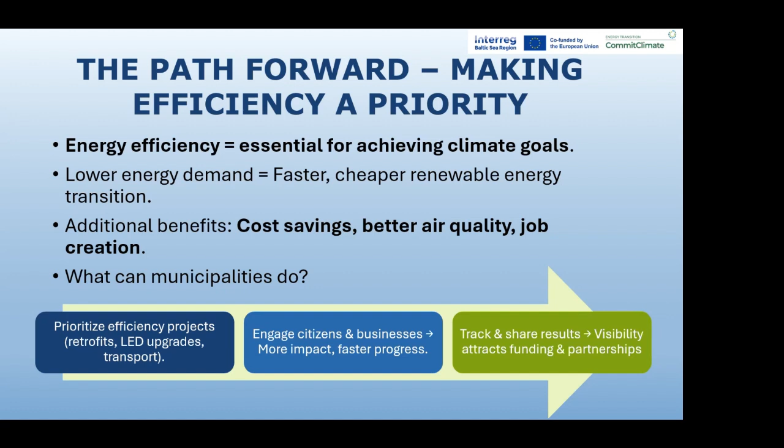So now, what can municipalities do? Firstly, they have to make efficiency the foundation of every action plan: invest in building retrofits, LED street lights, and efficient transport, for example. Secondly, engage businesses and citizens, because efficiency succeeds when the whole community participates. And thirdly, track and promote results, showing that progress attracts funding and helps scale solutions.

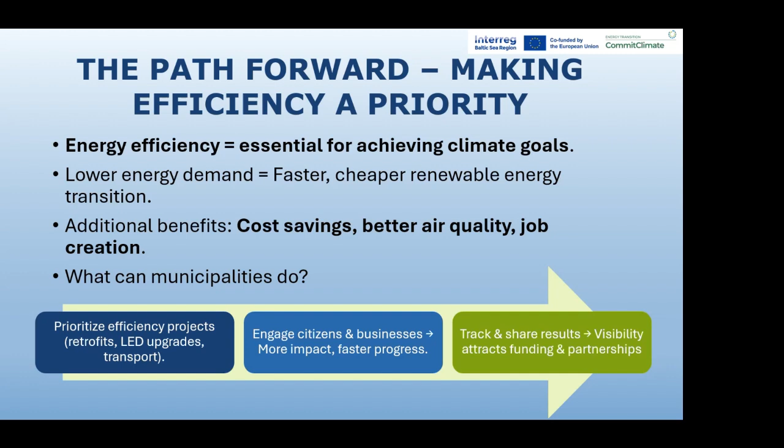So in short, if we want carbon neutral cities, energy efficiency isn't optional, it's essential.

Today, this topic is about empowering youth for energy efficiency. And as Alina already said, all the cities around the Baltic Sea region, and not only around the Baltic Sea but also in Europe, are fighting for reducing our carbon footprint and also for making our infrastructure, our buildings, more energy efficient.

In Latvia, we are in Riga, the capital. We are the largest city with more than 600,000 inhabitants, and if we look at the metropolitan area, then it's even bigger, approximately 1 million inhabitants. So the impact of Riga towards the country's carbon footprint is very significant, and the housing sector and heating sector are the major directions where we are focusing in order to make them more energy efficient.

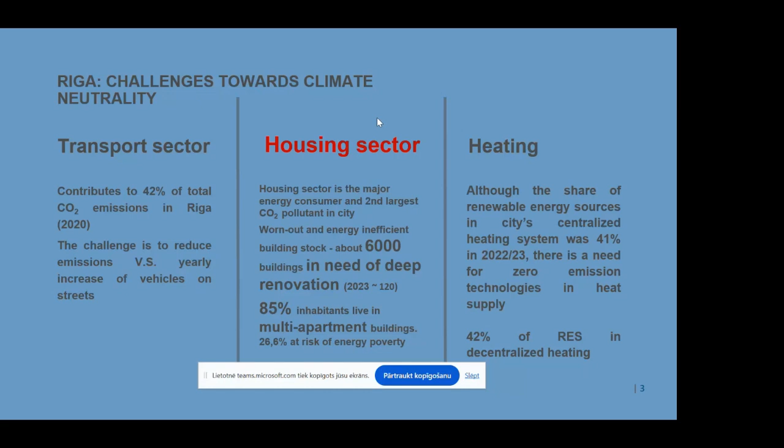We have quite a large apartment house market, our historical buildings from the Soviet time, especially approximately 6,000 apartment buildings that need deep renovation. And for that, we certainly need the support of our citizens and inhabitants of these multi-apartment buildings.

Riga city has already done a lot to engage our citizens in decision making and persuade them that energy efficiency is one of the main activities. We have, for example, the GeoRiga open portal where any citizen can come and see what his building is, how energy efficient it is, and it makes it easier for us to persuade citizens to invest in their houses.

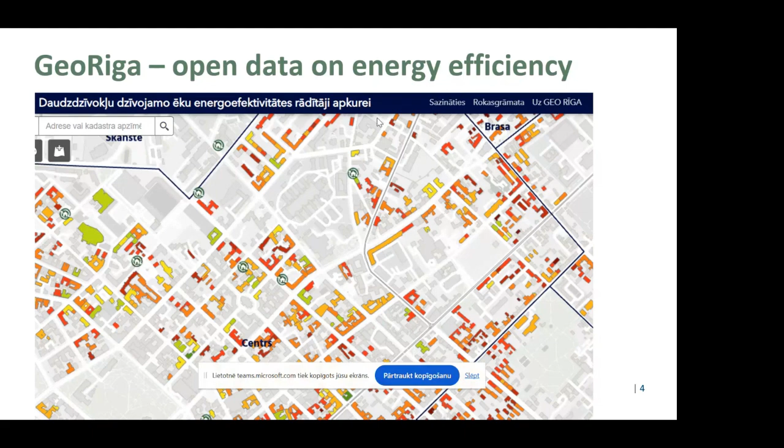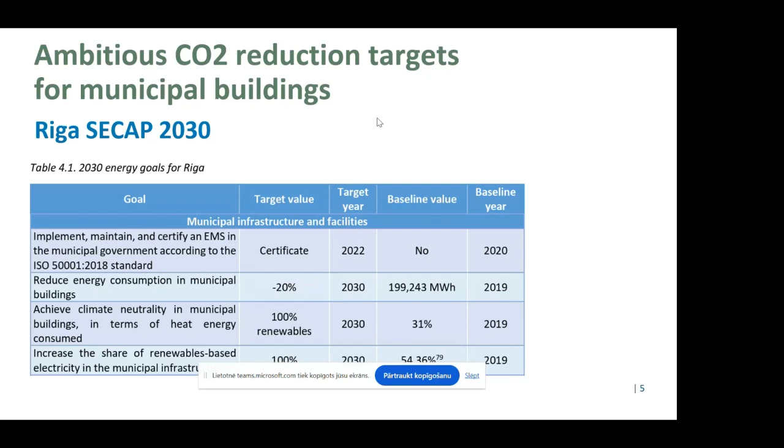As already Alina told, we have a quite ambitious sustainable energy and climate action plan for our city, where we have to significantly reduce energy consumption of municipal buildings, and also reduce CO2 emissions for the infrastructure.

What have we done already? In 2021, we set up an integrated monitoring system of our municipal buildings, where all the libraries, schools, and kindergartens were connected in one unified energy management system. Based on this, we can see in a centralized way comparative data on consumption of heat, electricity, and water, and we see the trends and where we could increase efficiency measures.

Of course, we also have invested heavily in our municipal sector, in schools in particular. We have had renovation of their heating systems, the general systems, so that the schools are prepared for much higher savings in energy consumption.

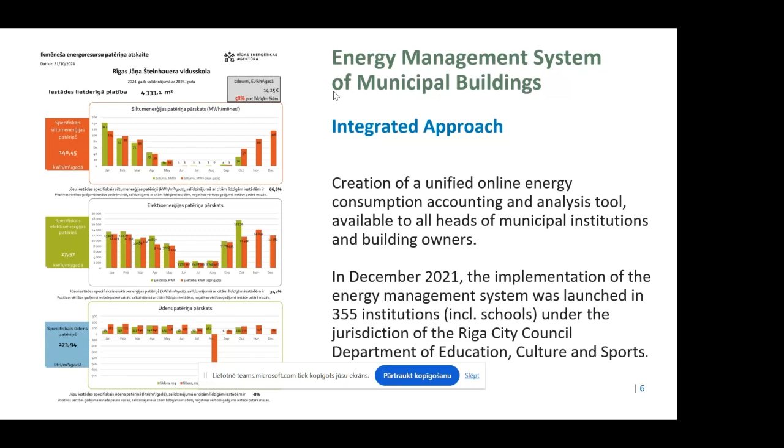But one of the daily challenges we face is how to ensure effective daily energy saving decisions. The masters, the directors of schools, are responsible for the educational process, not for the management of real estate. This is kept in separate infrastructure departments, in the financial and ownership department of our municipality. So sometimes we see that the schoolmasters and teachers are not so interested in saving energy, despite already having quite up-to-date modern energy systems in place in schools.

So one of the solutions we have found is that we have to invite youth to take part in the decision making in daily life, to empower existing eco movements in schools with additional knowledge and tools for how, on a daily basis, the schools and groups of classes can save energy, and to make this saving interesting and attractive, so the pupils can be proud of it.

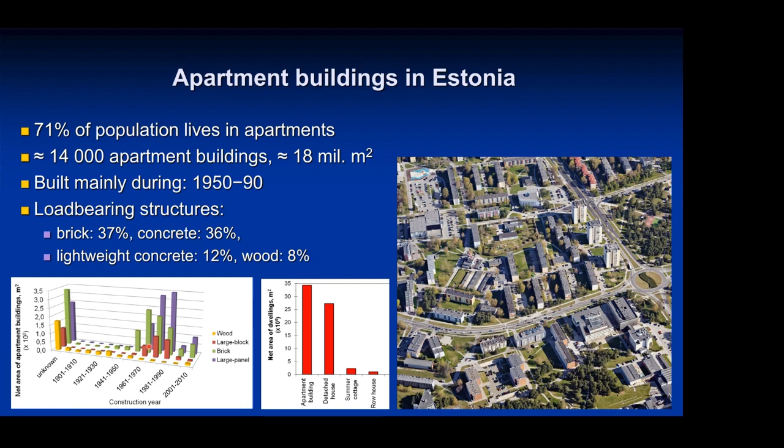These buildings are mainly constructed during the 50s and the 90s of last century. Typically they are brick or concrete large panel apartment buildings, and they were constructed during a very short time period.

If we see the construction wave during the 60s and 80s of last century, and if we add the typical design service life, we can see that already today older apartment buildings are in a situation where the design service life is over, and we have to renovate them anyway, in addition to energy performance targets.

This brings us from construction wave to renovation wave. We can see that during the year when we made the Estonian long-term building renovation strategy, the forecast is that the renovation volume will increase about 5 times.

For apartment buildings which are in the best situation, because there has been about 15 years of development for technical solutions, business models, and so on, we see an increase of about 3 times. But it is difficult to run 3 times quicker, or to renovate 3 times more with the same technology.

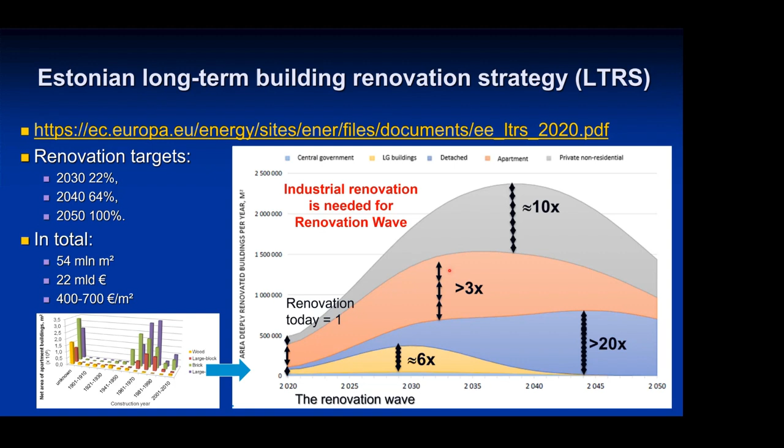We see that industrial renovation is needed for the renovation wave. If we look back more than 100 years ago, what happened in the car industry—we can see the same street in New York, Easter morning, same time of year, in 1900. Then we can just spot one car on that street.

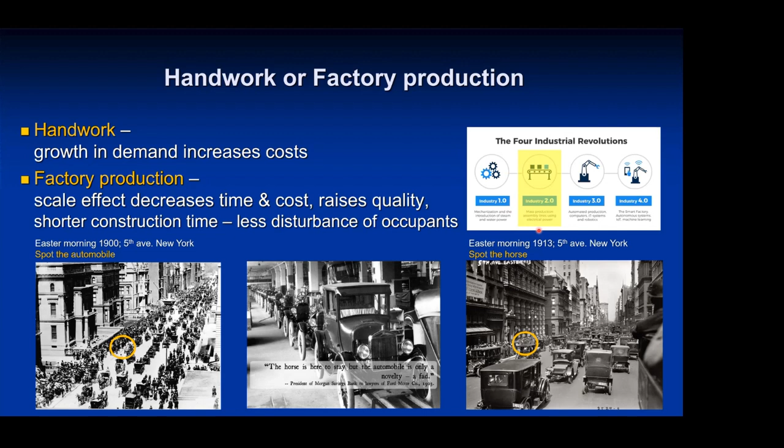After the car industry took up factory production, which is more efficient and can decrease cost, after more than 10 years we can spot only one horse and mostly cars. This is not a message that we have to drive by cars today, but it's a message that if we want to increase the renovation volume, we have to go to the next step in industrial revolution.

We have had many pilot projects in our university, all started with More Connect in 2014, 10 years ago. Then after that we had the Drive Zero project. Today we have more projects where we develop renovation with prefabricated insulation elements.

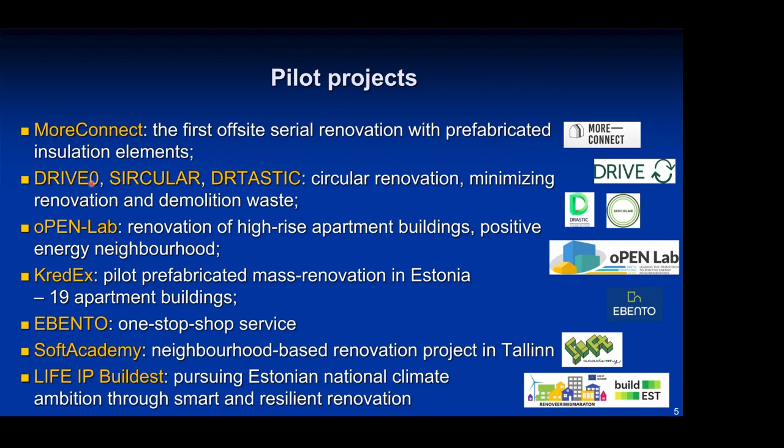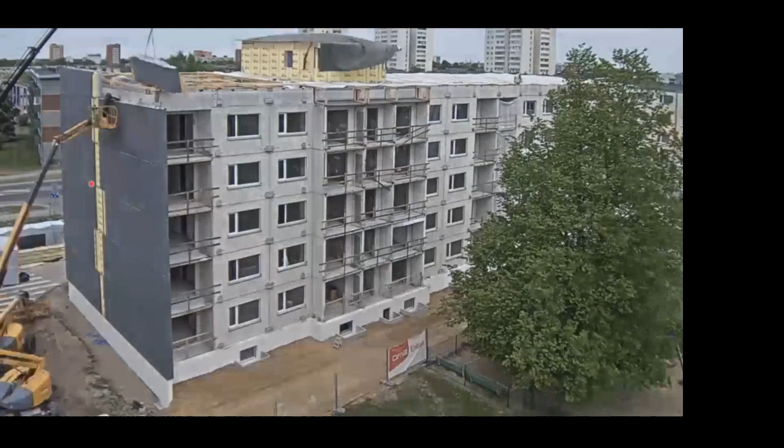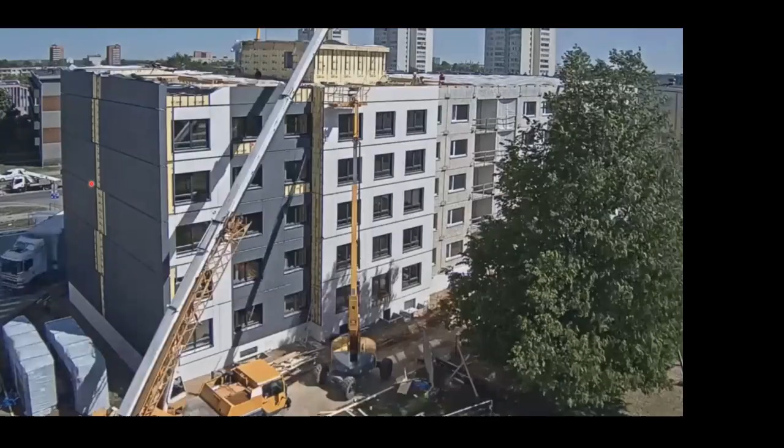What does it mean? We can see this on a short video, from 2017-18, when we renovated our first pilot building. This is a university dormitory. It was constructed in the 80s of last century and was in a condition that really needed renovation.

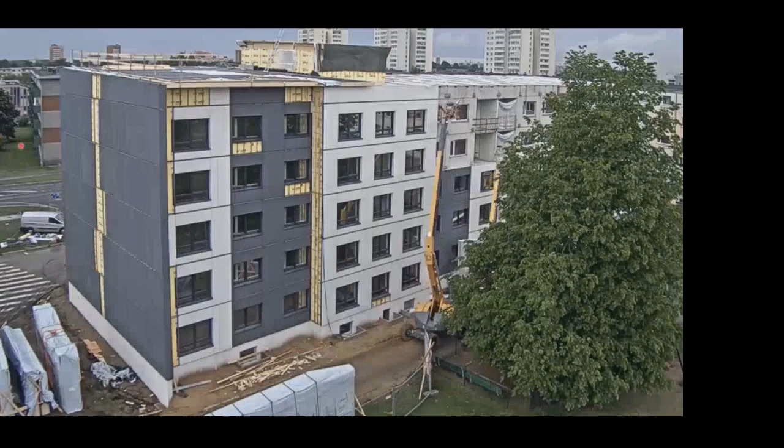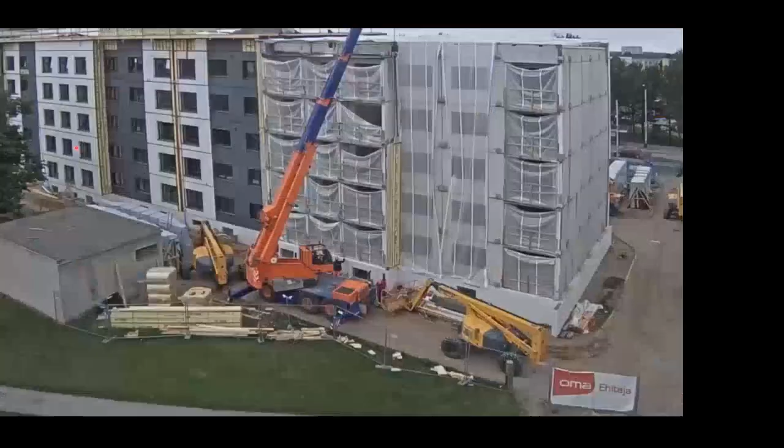Insulation elements were like 3 meters by 10 meters and were produced in factory conditions, transported to the construction site. Windows were installed already to the element in factory conditions. With this industrial technology, we can increase the quality of renovation and also the speed of renovation, and when there is enough volume, we can also decrease the cost.

Insulation elements are produced in factory conditions without rain or any other weather problems, and the quality is much higher because there are qualified workers.

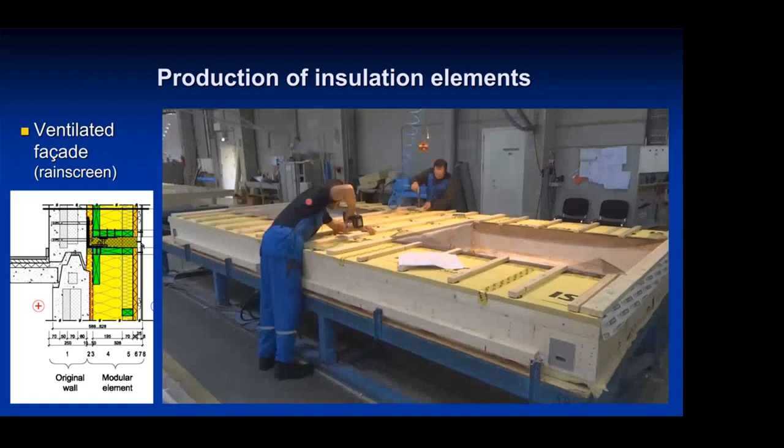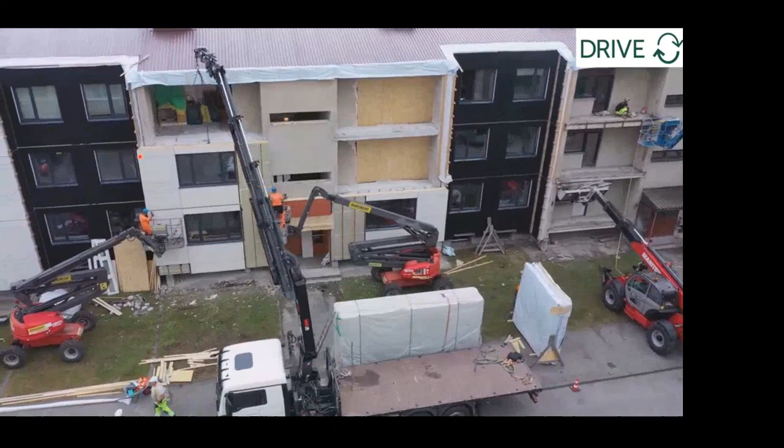This is the next pilot building where we renovated an apartment building so that inhabitants lived inside the apartment. They cleaned the kitchen in the morning and in the evening after they returned from work, and they continued their normal life. So 24 families in this apartment building lived inside the apartment during renovation, so they didn't have to move out.

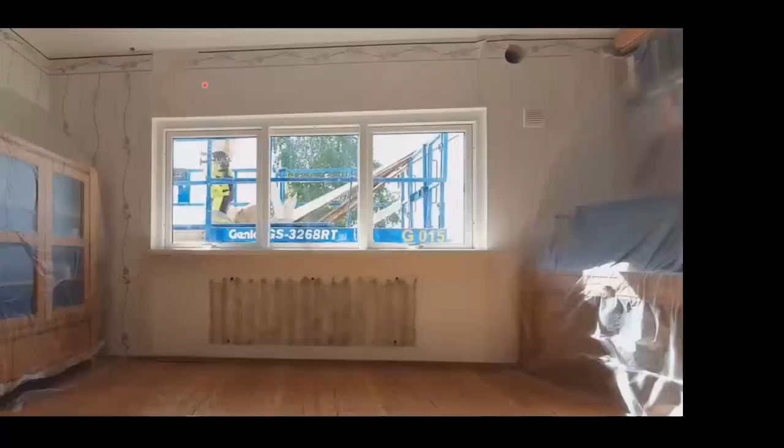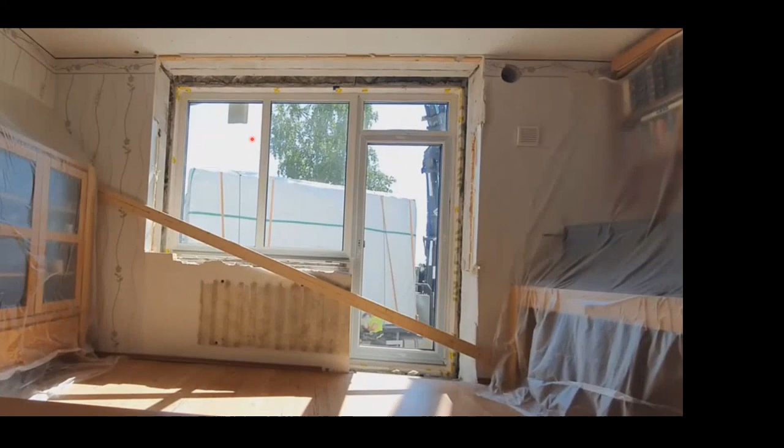We can see the installation of the element also from inside. To the southern side, balconies were added so that they also have the possibility to go outside from the apartment level. Insulation elements can also be put on the roof. First, we constructed a timber frame and then we added insulation elements above it. And on this small attic, we have ducts for mechanical supply and exhaust ventilation with heat recovery.

So together with insulating the building, it's very important that we also improve indoor climate. Without good indoor climate, the renovation is not an acceptable solution in Estonia.

And about cost, this is a cost overview of the second pilot project where we changed the energy performance certificate from level D to level A, which is the highest energy performance certificate level. It corresponds to a nearly zero energy building, and the cost was 500 euros per square meter of the apartment building, and this was in 2022.

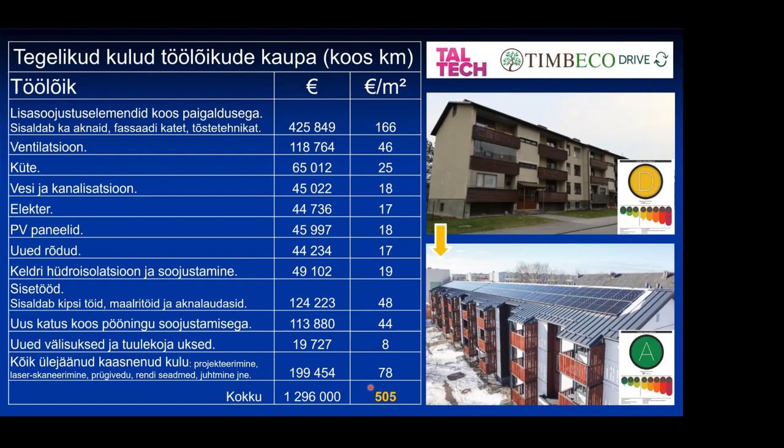And on the southern side, we have new balconies and PV panels on the roof. These PV panels produce as much electricity as the apartment building uses on an annual level. So from the electricity point of view, this is a zero energy building.

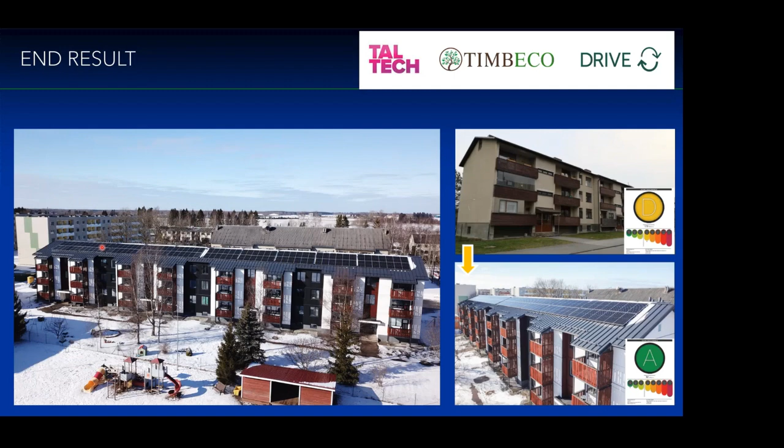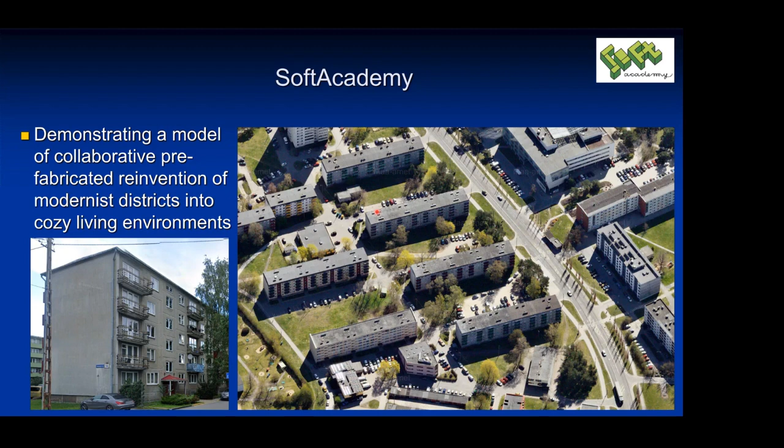Today we are working on the SoftAcademy project, which includes 4 apartment buildings. So this is the next step in industrial renovation, because we need a larger volume. When the construction company knows that they have to renovate 4 buildings altogether, they can get cheaper materials because the volume is higher, and also the price will decrease, or at least should decrease, as we have seen in the car industry.

Another important topic in this project is to develop a renovation one-stop shop or service for the local municipality, so that the local municipality can consult apartment building or detached house owners to get renovated. There are many topics that need to be solved.

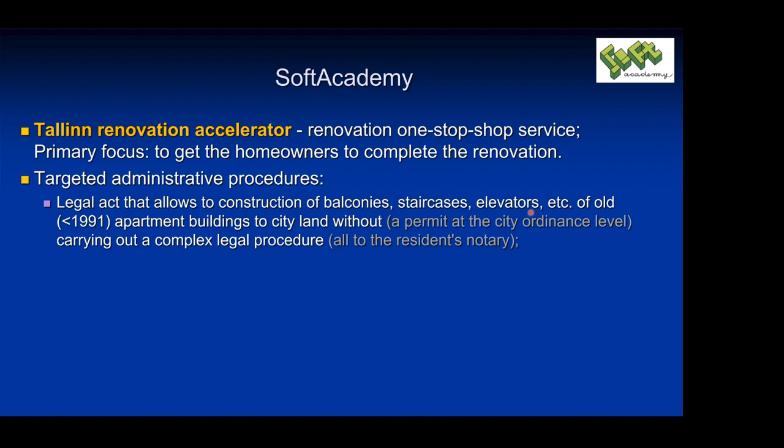For example, when an apartment building wants to construct new balconies or staircases or elevators, in some cases the border of the land is just some meters from the building, and the target is to make some kind of legal order so that it's allowed to construct this new staircase on municipality land without any complex legal procedures, and the same with balconies.

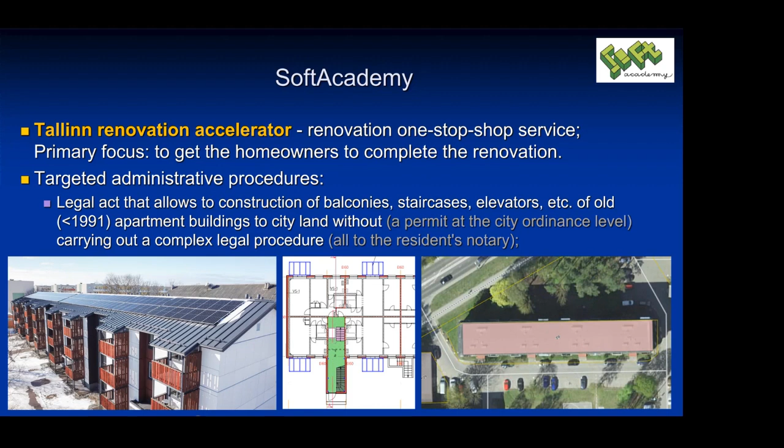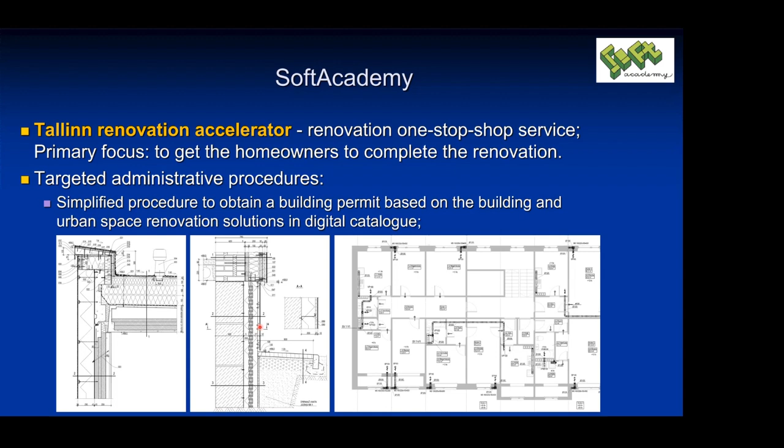Another challenge is to make a procedure to simplify the design process. If we have typical buildings and typical renovation solutions for building envelope insulation or ventilation, then we could get the building permit for renovation based on these typical solutions.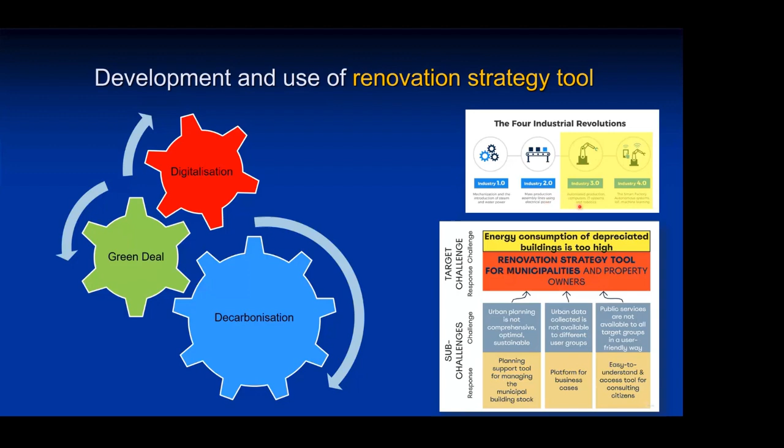The last part of my presentation is about the renovation strategy tool. Here we combine digitalization, the Green Deal, and decarbonization targets. And we are making the next step in industrial renovation, from mass production of renovation for mass renovation to information technology.

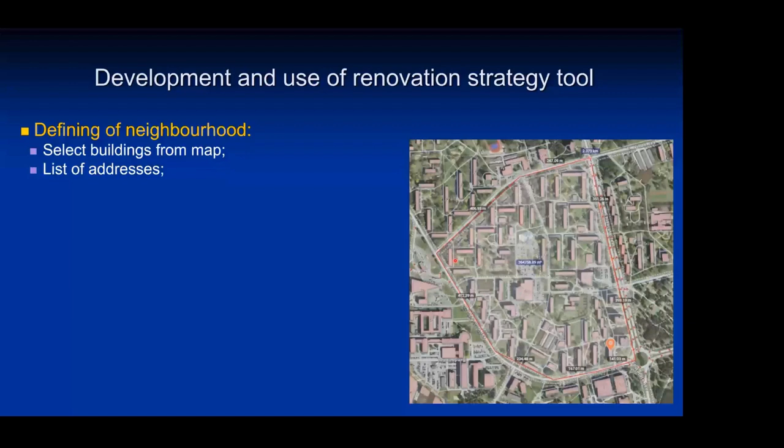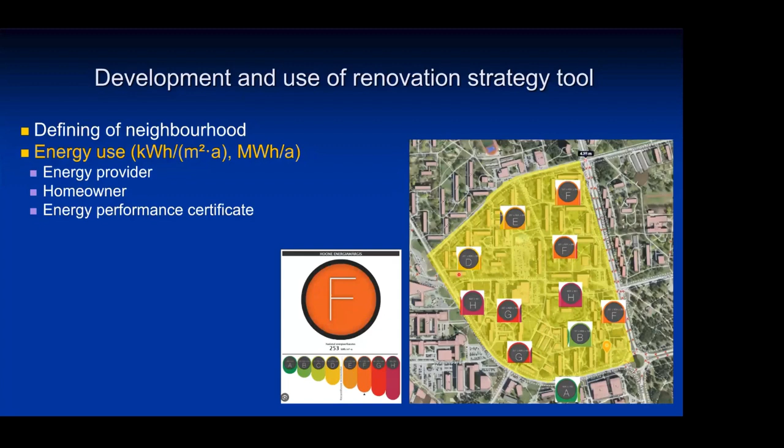Let's take one example from Mustamäe district. We first define the area that we analyze. Then we get information about the current energy use based on energy certificates which are in the building register. In Estonia, we have a digital twin for all buildings. For example, with this aerial view, we have geometry from all buildings, and based on this, we also have trees and other information about nature available.

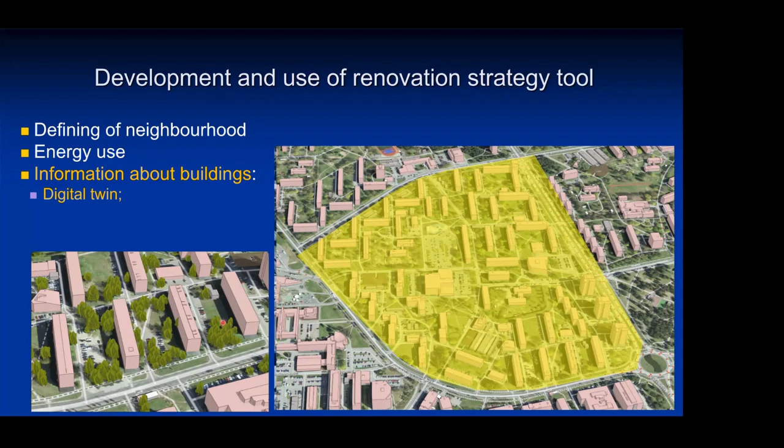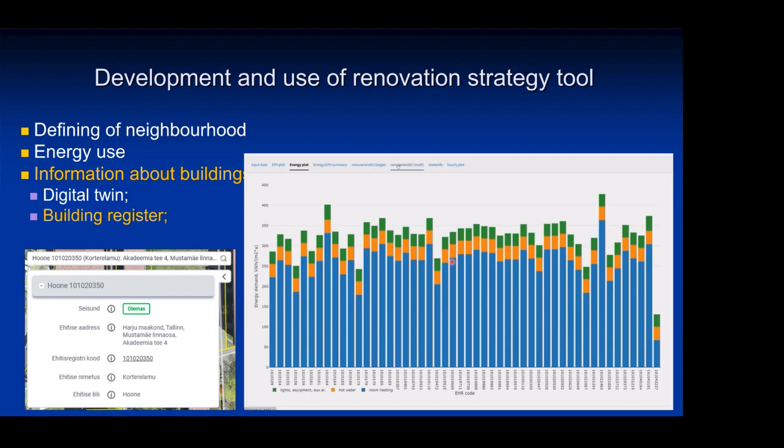And then we get building register information about the area of the building and the energy use of the building, and then we can develop renovation strategies not only for one building but for multiple buildings or for a whole neighborhood.

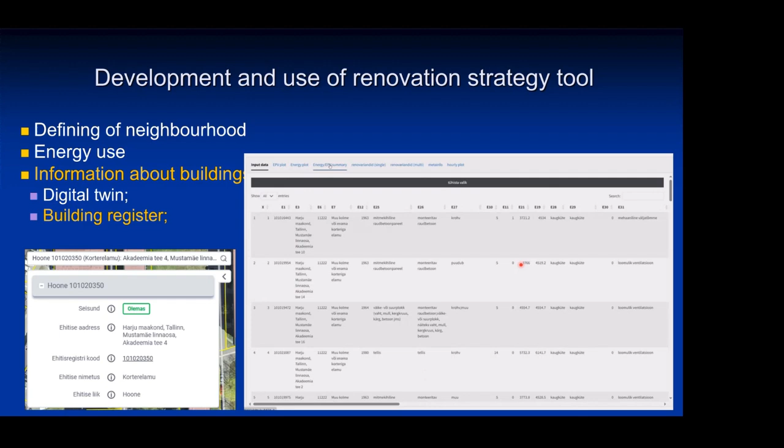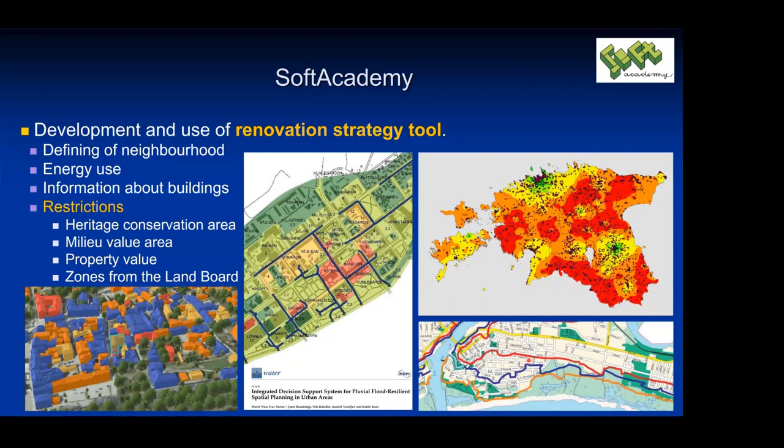And then we can consider different restrictions. For example, are there any heritage buildings or monuments that cannot be renovated in the same way as typical buildings, or what is the property value, or do we have any problems with water, and so on.

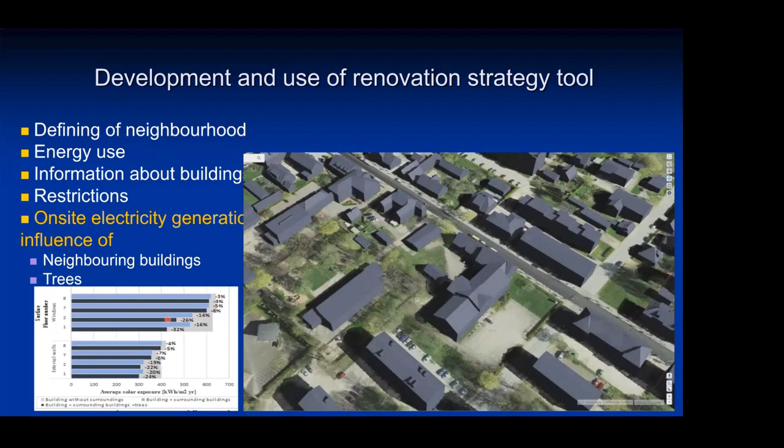If we want to produce electricity on site with PV panels, then we also have to consider neighboring buildings. Based on our analysis, we have shown that with the current methodology, which assumes there are no neighboring buildings or trees, the real electricity production can be up to 1/3 smaller.

Then the final solution can be optimized depending on different targets, depending on money or CO2 or other parameters. So this was a short overview, and I'm looking forward to your questions.